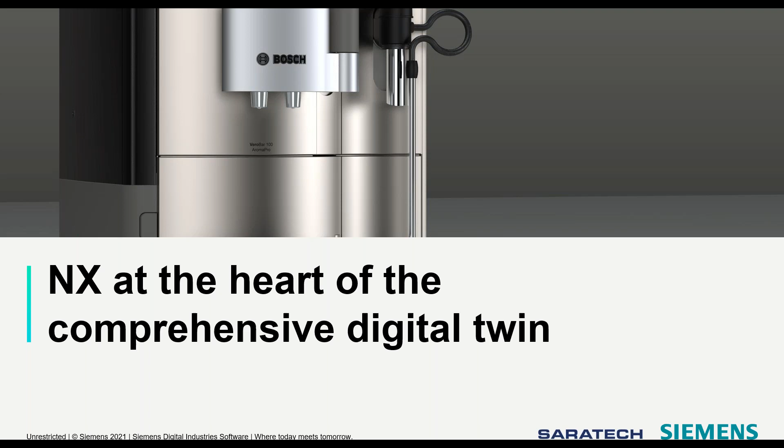First, I want to talk about the digital twin. You'll see here that NX is at the heart of the comprehensive digital twin. But what exactly does that mean? When a digital part behaves within NX exactly as its physical counterpart in real life, the NX part is a digital twin. Establishing the digital twin in Siemens Digital Industry software is one of our key goals. The digital twin has a role to play in all aspects of PLM, from conceptual design through testing, through production, marketing, and even sustainability. The image that you see here is of a coffee maker / espresso machine.

It's gotten to the point where, depending on the use of our images, we've been asked to add some sort of wireframe to these types of images, just to let users know that these are generated on the computer. They look so realistic that you really wouldn't be able to tell. But that's the whole point of taking it to the next level with the digital twin.

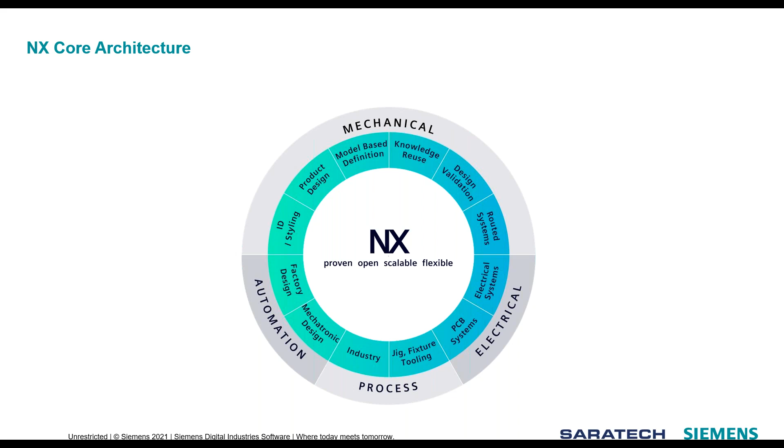So I want to cover a few areas within our core architecture to start us off, and talk a little bit more about where we're going.

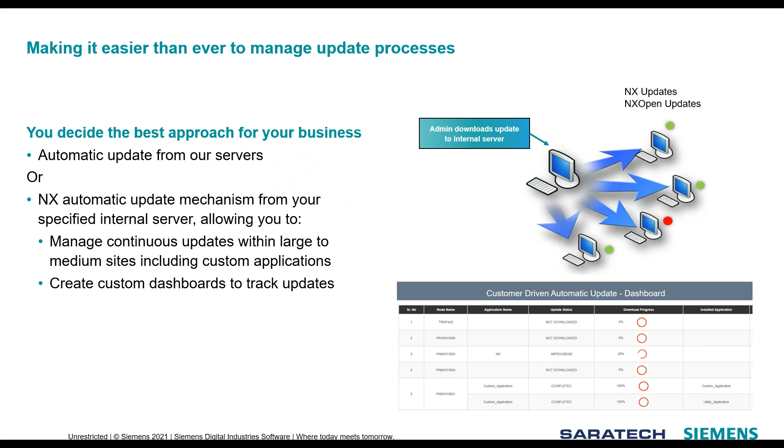We continue to ramp up the intensity of our continuous release process. Gone are the days when you have to halt work because of major software upgrades, and those who have adopted continuous release also have been able to appreciate the flexibility of being able to skip releases that don't really impact their work. The latest improvement here is that we have more tools that enable IT organizations to control upgrades to continuous releases within larger enterprises. What this does is this saves significant deployment costs within your organization.

We're also striving to make our users more productive. One of the ways we've done that is with our Discover NX framework, which uses artificial intelligence and machine learning. It makes it easier to adopt NX by suggesting tips, videos, even trials based on customer usage and your profile.

So we continually monitor not just commands, but overall sequences of events that will help to improve your productivity, often with the goal of establishing a best practice for you and your colleagues in your organization. This is a really big step within the software itself to help you better understand more efficient workflows that you may not have realized are possible.

We also want to deliver a personalized experience for you, and there are a couple ways in which we are striving to do that. Our adaptive user interface learns from your usage, and it can predict the next command based on typical workflows that you carry out.

But what's new in this area? One of the things that is new is called selection prediction, which allows you to predict input selection objects for modeling functions. Select similar is another feature that will identify geometrically similar components with machine learning enabled shape recognition.

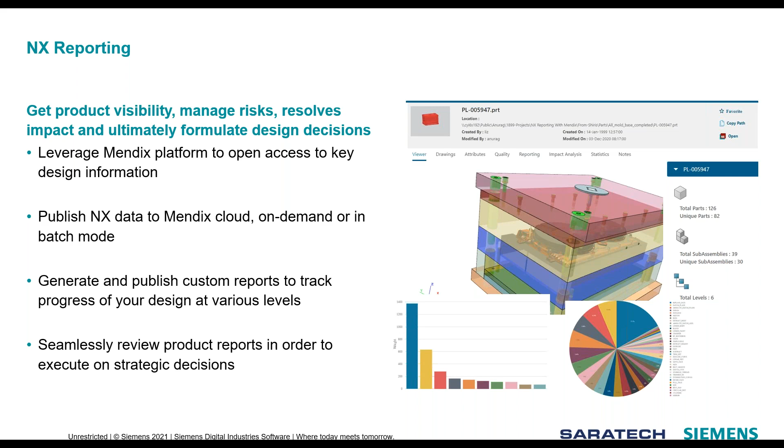These reports can be easily shared across your team or other teams within your organization. This can really help you be more self-sufficient without waiting for more functionality to be added to NX. It gives you the tools and the power up front.

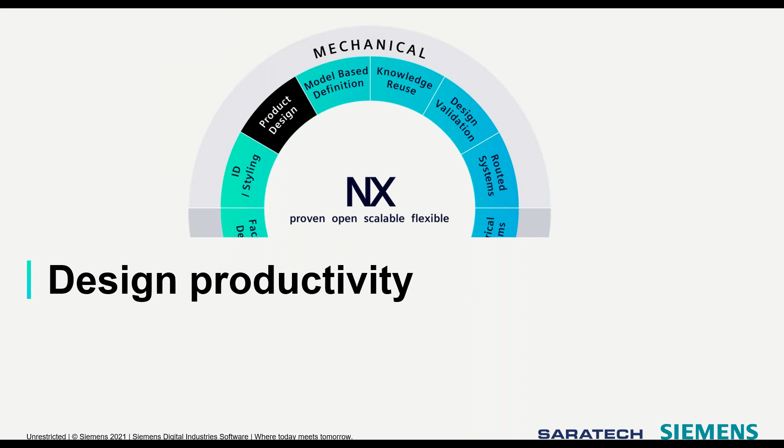Now I want to talk about design productivity, and this is really kind of the core of NX and where a lot of the power lies. I could spend a lot of time going through all of the enhancements to design productivity, but for the amount of time that I have with you today, I want to provide a select few.

There are a few different areas of enhancements that ultimately will help you become more productive. There are continued enhancements to synchronous modeling and its underlying technologies, increased support for new workflows in additive manufacturing, more support for collaborative multi-user design processes, and a tighter integration between NX Structure Designer and Simcenter for frame design.

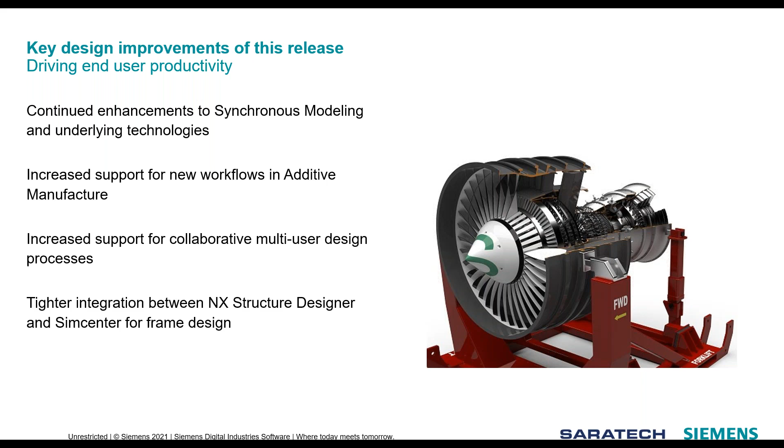So let's get into a little bit about synchronous modeling and synchronous technology. Synchronous technology started as a way to repair models imported from less accurate systems. It's now been enhanced to support design operations.

In support of this, there are a few new fast selection methods. One is called clone selection, which makes mass changes easy. We also have something called Resize Hole, which is the first implementation of this new technology.

The goal with both of these enhancements is to help speed up your current design processes, to help you get your product or project to market faster, and ultimately potentially gain first mover advantage within any market.

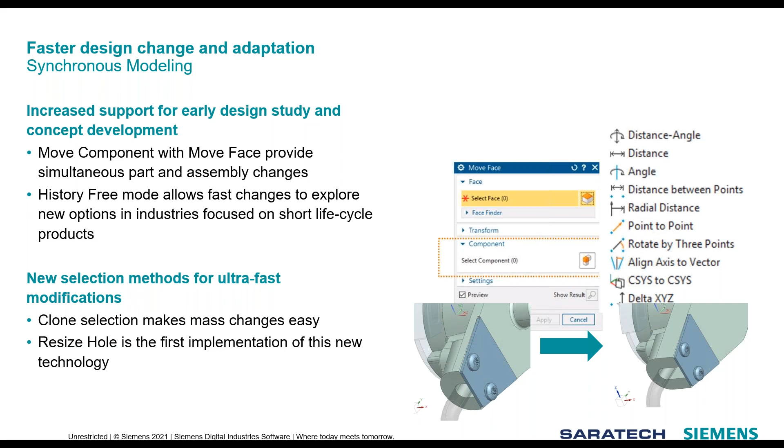Next up is what's new in our NX additive manufacturing solutions. More support for additive has been added, including model cleanup and preparation for 3D printing, and new support for validation of engineered porous structures.

With these enhancements, based on customers we've talked to, we're making specific design for additive workflows 50 to 75% more productive. Think about the impact that can have on your organization and the cost that can decrease. As an example, we had somebody go from a lead time of 26 weeks to 3 weeks. They were also able to have a 22% weight reduction, and it really simplifies their additive processes.

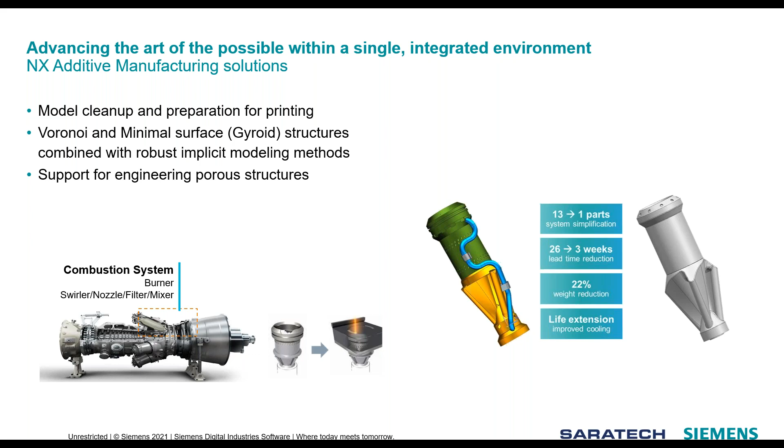This is more important than ever with us working remote due to the pandemic at this time. You don't want to negatively impact your colleagues' work, so this can help reduce any of those instances that you might face.

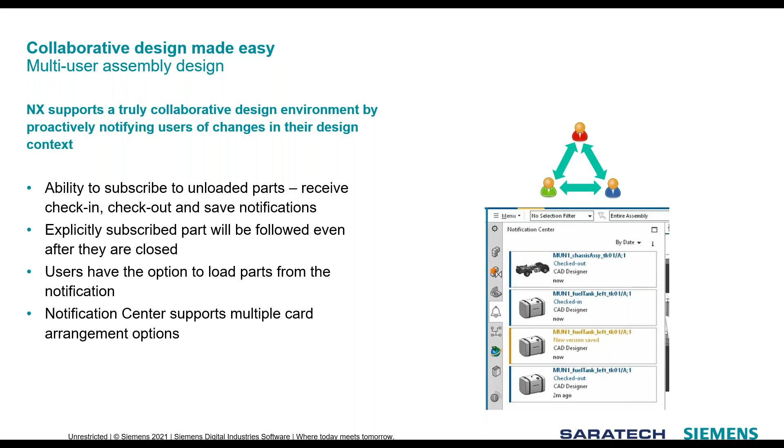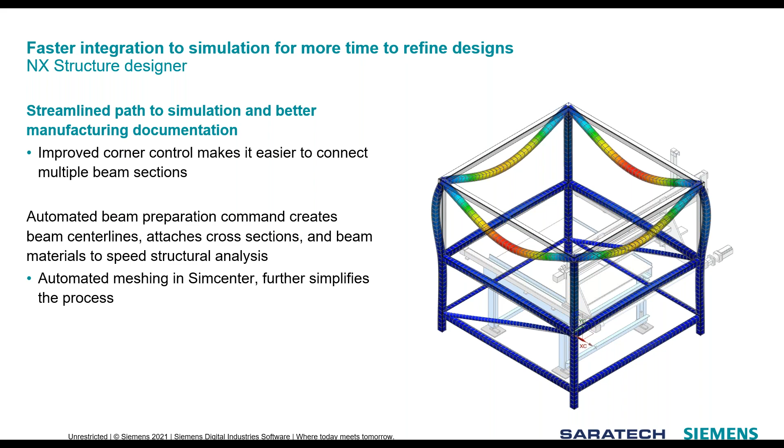Let's switch gears and talk a little bit about NX Teamcenter Integration. There are some new NX solutions integrated with Teamcenter to help increase confidence in product quality with clear visualization of the digital twin as it evolves.

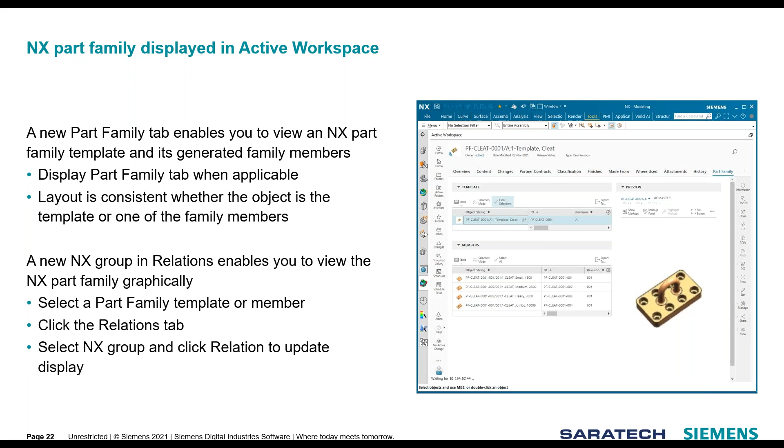So let's talk about design validation solutions. There are a few areas within design validation to cover so that you can have more confidence in your designs.

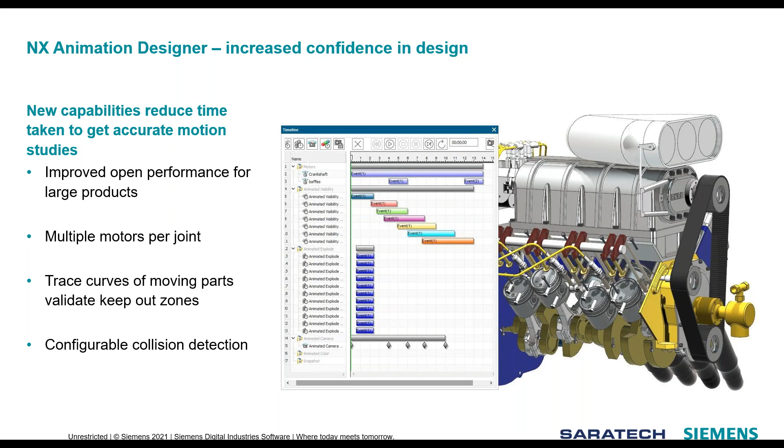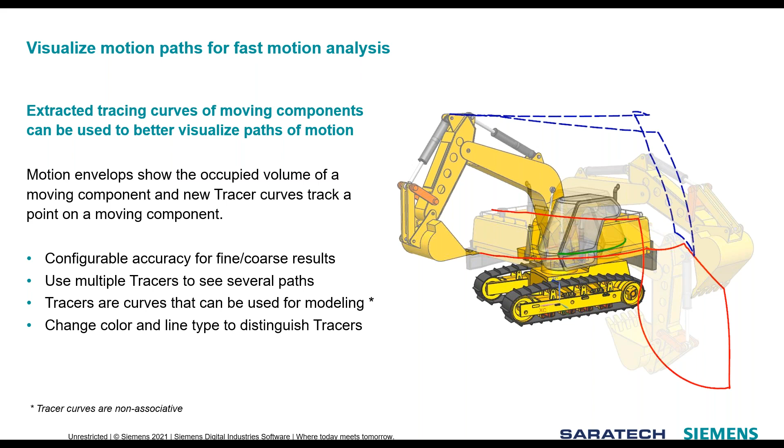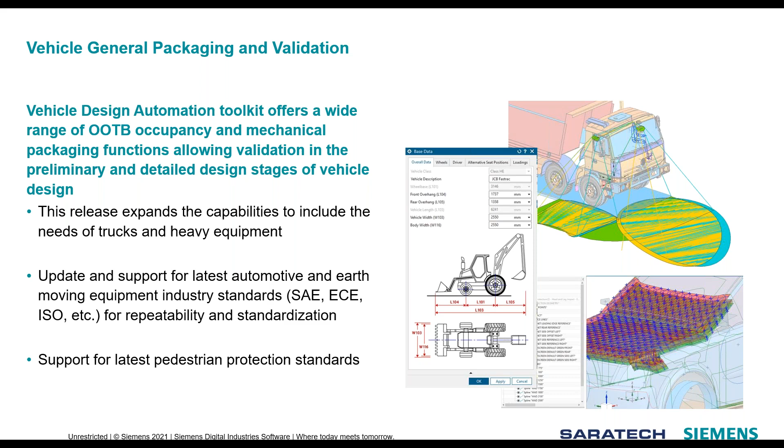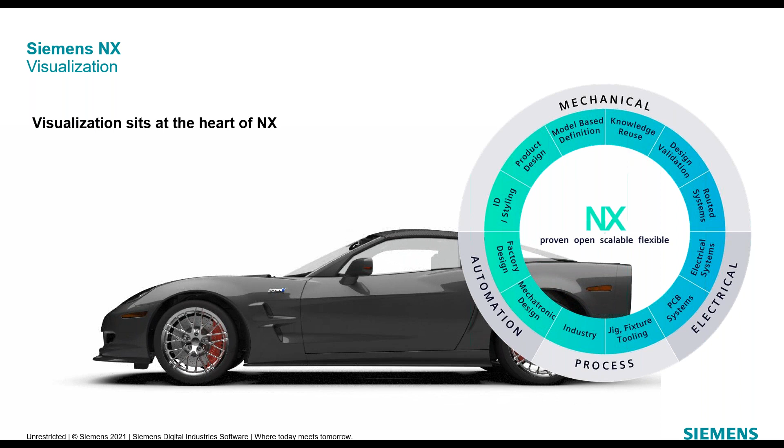Now let's get into some of the more visually appealing things within this release, and let's talk about NX visualization. It sits at the heart of NX and supports many different workflows within NX, not just the high-end side. We're constantly working to improve the overall design experience for all users and all levels of fidelity.

In this release, there's been a number of new capabilities to enhance NX visualization workflows to increase confidence in your product design. There are improved decal capabilities. There is Oculus support for NX virtual reality. There's been performance-driven enhancements by some customers. And then there is a new product called NX Extended Reality.

Let's first discuss improved decal capabilities. Decal positioning was enhanced to use in-window manipulation and sizing tools, with standard tools to set orientation—planar, cylindrical, spherical, and UV map types. The overall dialogue workflow has also been simplified. In our user testing, this enhancement showed a 3x improvement for design authoring.

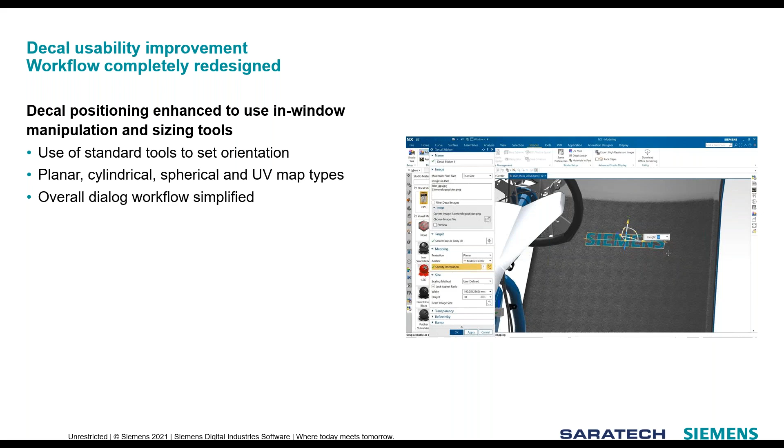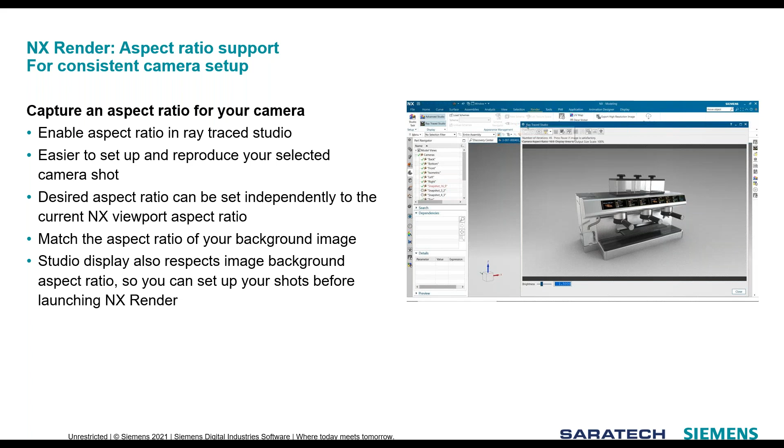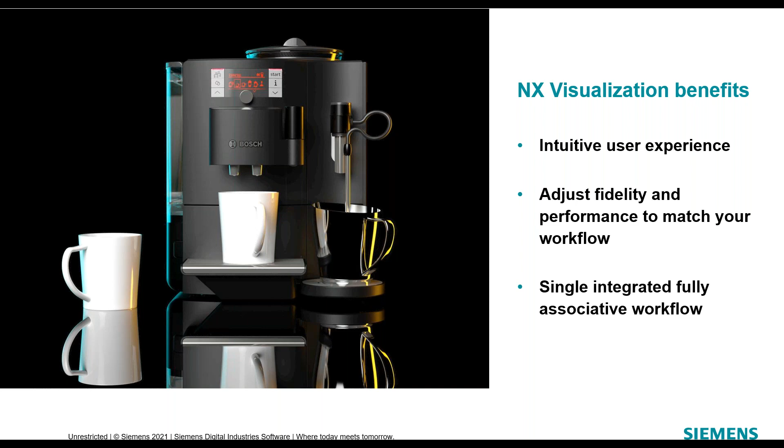I want to close out by stating that the enhancements you've seen in this deck really support our efforts to provide a comprehensive digital twin of your product. We're striving to make NX more adaptable and personalized, and we continue to build on a flexible, open ecosystem—making the software more personalized and adaptable to you while providing that open ecosystem as software should.

I want to leave you with this image here. If you follow our hashtag NX Makes It Real on LinkedIn, Twitter, or other social media, you'll be able to see and stay up to date with some of our latest enhancements, and read materials on the latest enhancements as well as other industry-specific marketing materials. Thank you all for your time today, and thanks for having me on. I hope you have a good rest of your day.